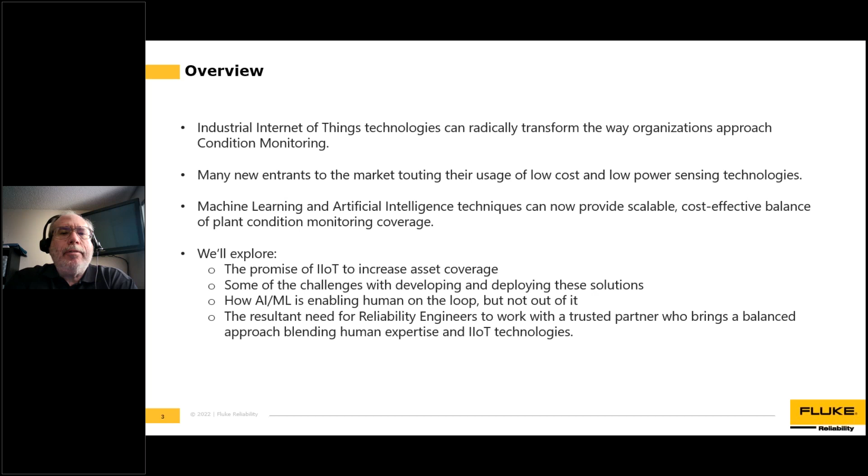Thanks, Georgia. So let's get started. What we're going to be talking about today is a lot of the things that we've been seeing over the years and hearing a lot of buzz about, the Internet of Things coming to fruition with condition monitoring. Here's an overview of what we're going to be talking about today. I'm not going to get real deep into this because you'll see each of these, and you may have already seen this overview, but we're going to talk a little bit about each one as we go through and discuss how the Internet of Things is going to be affecting condition monitoring.

So let's just jump into it. What we're seeing is, and keep in mind that condition-based maintenance, vibration analysis, reliability, and improved maintenance have been around for many years. It's not like we're reinventing the wheel or redesigning it. It's just a way of using today's communication and other advancements to make things run smoother and give us a nice fresh way of doing what we've been struggling to do for many years.

So what we're talking about here, we're going to walk through each of these steps real quick. Even before we talk about this potential failure curve and acquisition of condition monitoring data, we want to talk a little bit about installation, because if you already have machines in a bad position, or if we can make machines a little bit healthier, it can help us out. So let's jump into each one of these steps real fast.

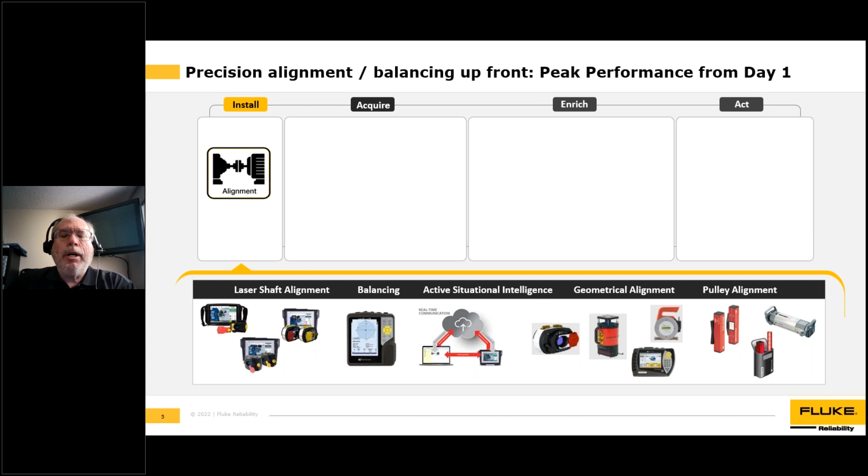So even before acquiring data, we should make sure our machines are in the best possible shape. And then we start acquiring the data. Good data is paramount to getting good information.

So we're going to talk a little bit about that. The first step of getting answers is to start with data and connecting that data, not just getting a bunch of numbers from a lot of different tools.

So the next step we want to talk about is getting data from multiple tools and multiple technologies, from people, from observations, and from pictures, and enriching that data to get answers from it. Because numbers on a chart, in a spreadsheet, in a desk, in a file cabinet isn't doing us any good. So connecting that information and getting answers out of that data is really a key point.

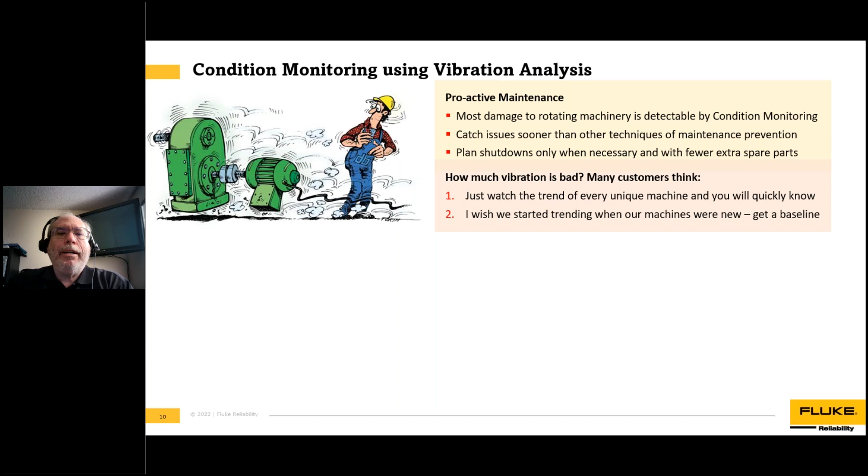The purpose of this is so that from the vibration of the machine, we can know the condition of the machine and fix it in advance, and have fewer parts. A lot of people, when they first hear about this concept of using vibration, think that it's easy, basically like a temperature or pressure, just a number. They think that if all they knew was the vibration, they would somehow automatically know what is good and what is bad, and when the vibration got high, they would fix the machine.

Well, let me tell you, it's a little bit more complicated than that. So the bad news is vibration from a machine is very dynamic. It's like an EKG on a person. An increase in vibration could be from not just a fault, but from background noise, adjacent machines, the structure, resonances, changing load and speed. Somebody could have started up an adjacent machine and the vibration could increase.

And what is the vibration level that you need? So it isn't just a number, and we can't just magically watch that number. The good news is vibration experts have been analyzing data for 30, 40, 50 years and have a good idea that a mechanical fault has a pattern. The algorithms and rule bases that vibration experts have been using can tell us if it's noise, or structure, or a fault. So what I'm trying to say is, it isn't just a simple number. It's like a doctor having to read an EKG.

The other thing is, a lot of people think that they needed to do this when the machine is new. Well, I can tell you from personal experience that just because a machine is new doesn't mean that it's healthy.

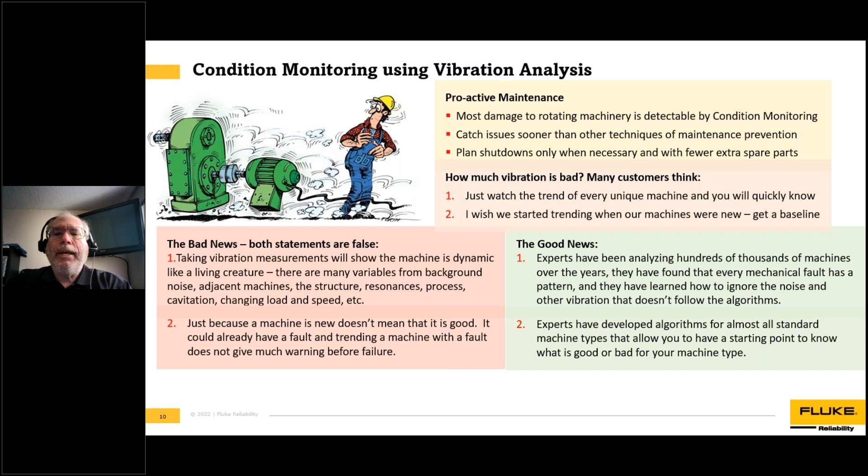What we really want to do is look at the machine and watch it over time, and look at patterns and look at different machine types, because we know that vibration from a certain type of machine, like a motor coupled pump, is going to have certain vibration and certain patterns, and so we can learn from that.

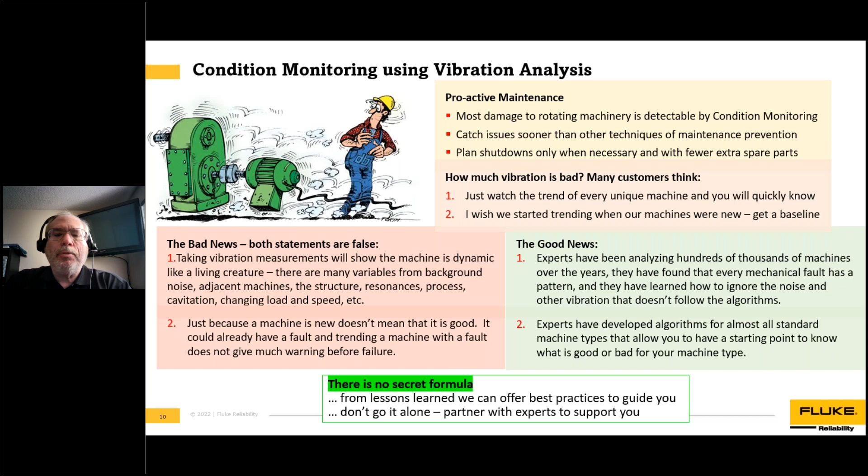What I'm trying to say is, there is no black box, there is no magic secret formula, but from lessons learned from looking at machines over the years, we know what the patterns look like and we can follow some best practices. And also, don't do this on your own. It isn't something you're going to want to do alone, you're going to need some help, and we'll talk a little bit more about that.

So the next thing, and again, I apologize for vibration experts on the call that already know this, but for those that aren't vibration experts, let me do a little bit of an explanation on what vibration is, because a lot of people have this idea that vibration is a simple number. There's really 3 different types of vibration.

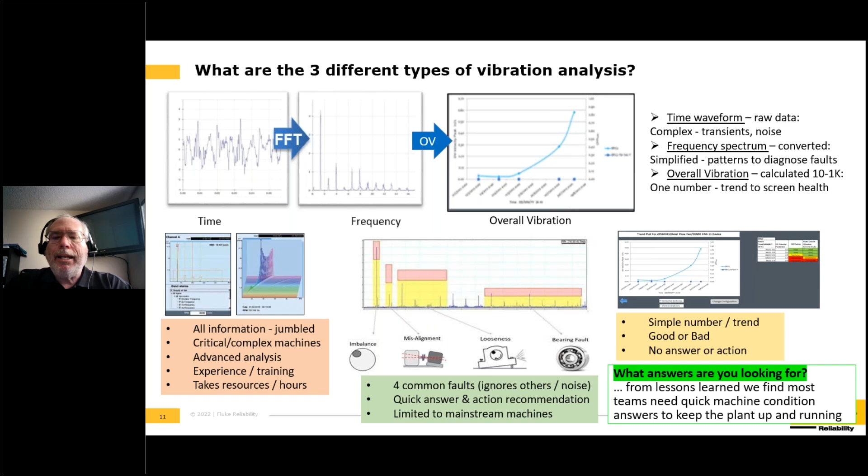So we need to get answers, and I've already talked about that. All right, so with a lot of the new things coming on the market, we're seeing a lot of low cost and low power sensing technologies, and they're all promising to be able to give you success.

What we've been finding out is that when you look at a customer's goals of wanting to be more proactive, with cost savings and continuous improvement, to actually deliver that and have a successful program where you see more uptime, better cost, more production, better reporting, to get from point A to point B.

We can't do that with just simple, easy to use hardware, because like what I showed you earlier, if we just have overall vibration meters, really all that's going to tell us is the machine good or bad. And because it's only collecting in the low frequencies, it's not going to give us any bearing information. So it really isn't going to get us to the point where we get the answers we need, and we need answers to be able to fix the machine.

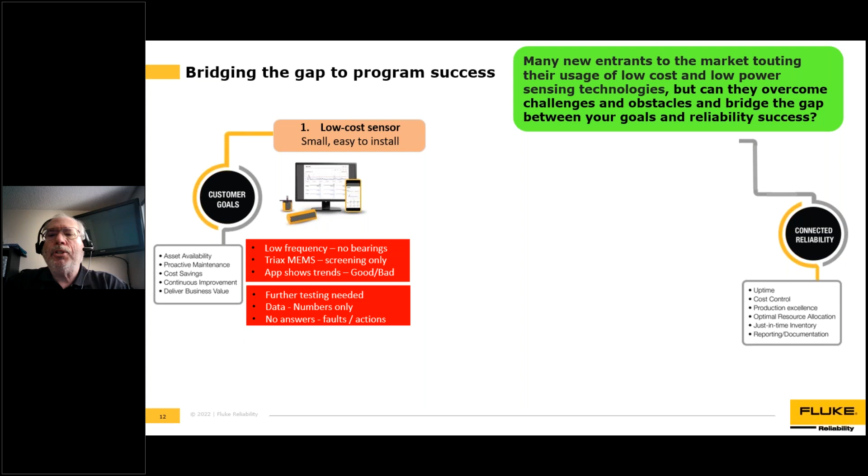Just knowing if the machine is good or bad doesn't get me from point A to point B. All it tells me is that further testing is needed, and just trending a vibration number does not get me the end result of getting the machine up and running.

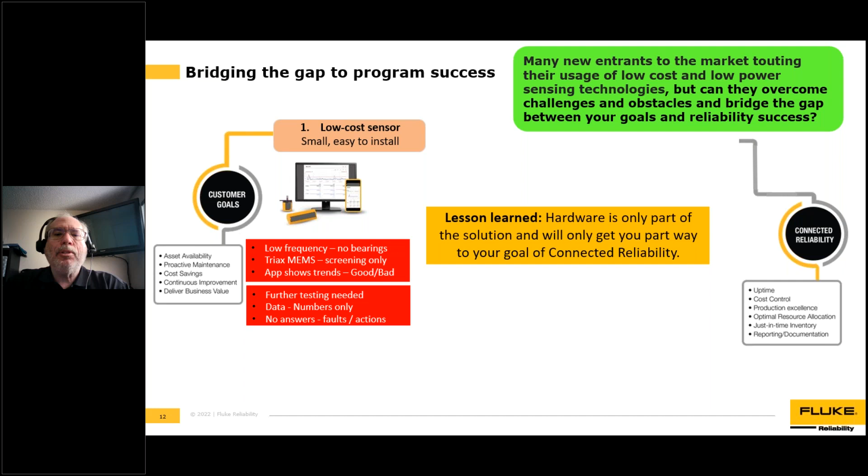So what we've learned is that hardware only is only part of the solution. We need to be able to do more than just a vibration data collection program. So how do we do that?

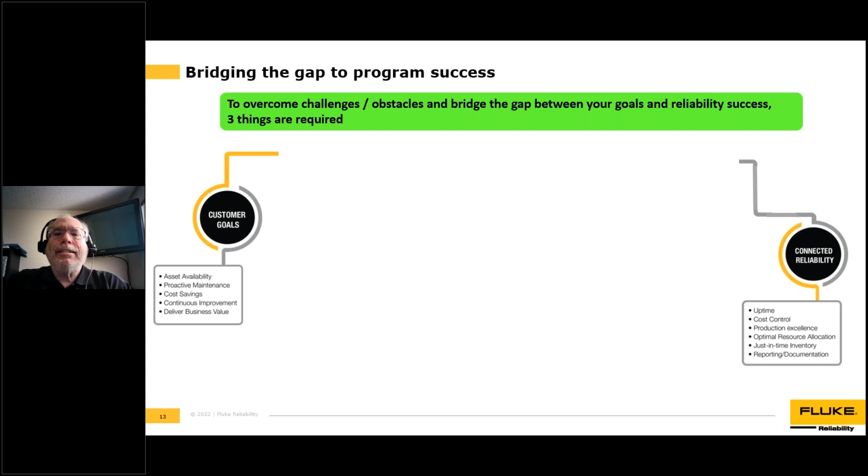What we've learned over the years is that to bridge the gap between your goals and a successful program, you need three things. One is you need a sensor that's going to be able to look not just in the low frequency, but the low frequency and high frequency. So by looking in the high frequency, we can also see bearings.

And like I showed you earlier, we're going to need to be able to look at the spectral data, not just overalls, because we need to look at high frequency to find bearings. We need to look at the spectrum to be able to find the patterns. And the purpose of getting this better data, or best solution data, is to be able to get answers.

Because if all I'm looking for is just a vibration number, then just go for the cheap vibration sensor, but that's not going to get you what you need.

Now, when you think about it, some of the obstacles we're going to run into is, how do I build a program when I'm already 100% busy? And how do I make the best decisions if I don't have complete data? So that's really the challenges that we need to overcome.

We need to get the best data. We need to get the right data. We need to be able to make it into answers, and we need to be able to get alarm notifications. So to do that, to get the answers from the data, it's going to take software plus the hardware.

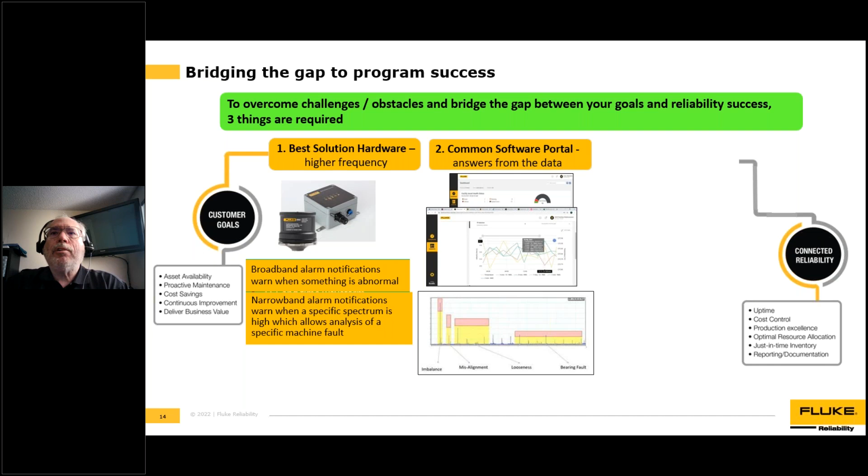With this information, now we can make the right decisions to know when to take a machine down. The challenges that we're going to run into next to be able to get to our goal of a successful program is how to set the alarm levels, and if we have limited resources, who's going to be looking at all these graphs and all of this data?

So we're going to need to be able to reach out and get some support. And one way to do that is expert assistance from remote vibration experts. Another is to have programs and support services to give us support and help us grow a program.

Artificial intelligence, ways to look at these algorithms. And so it's not just that we have to have somebody look at hundreds of sets of data, but it's going to mean that we're going to have to think about this, and to get from point A to point B.

We're going to need to collect the data that we need to get the answers that we need to be able to then generate work orders and have somebody go out and do it. It's a lot more than just a vibration meter.

So having these three parts of the program gives us a solution. A solution is what we need to keep a plant up and running.

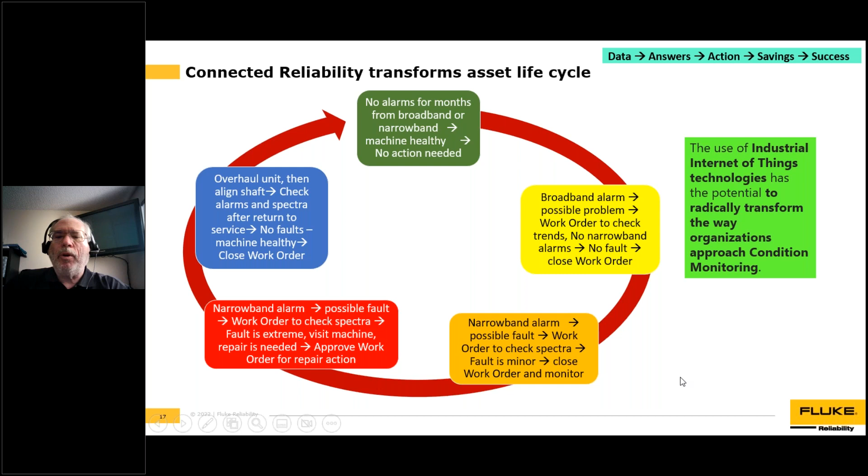The last thing I'm going to roll into, in the last couple of slides here, is don't do it on your own, because there's a lot of people out there that can help. So we're going to talk a little bit about companies like Fluke Reliability that's there to help you as you go.

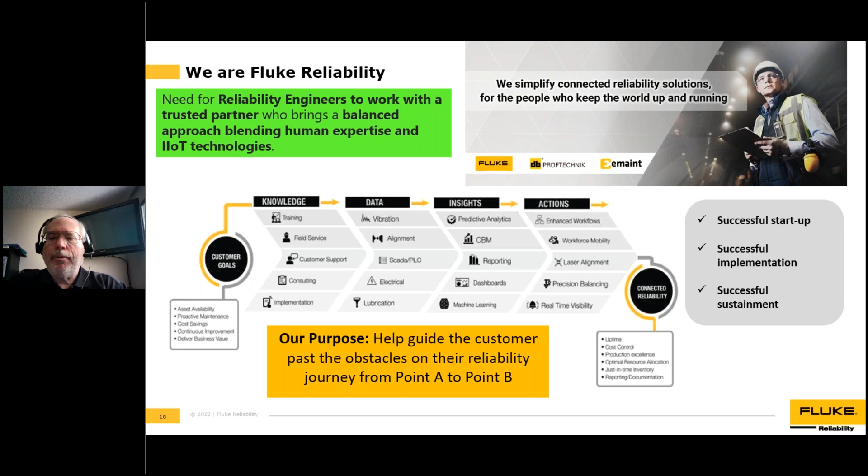Okay, kind of as a summary, just a different way of looking at this. The lessons learned that we've seen over the years is that if you want to get from your goals of an improved maintenance program to the success of a program that's really starting to deliver and give you what you want, you need to have the best solution hardware, but it's not the only answer. So you need to be able to get the data you need. Remember, high frequency data, and you need to be able to get the spectral data, because we need to be able to look at patterns. Overall vibration in the low frequency only isn't going to give us the information we need to get the answers.

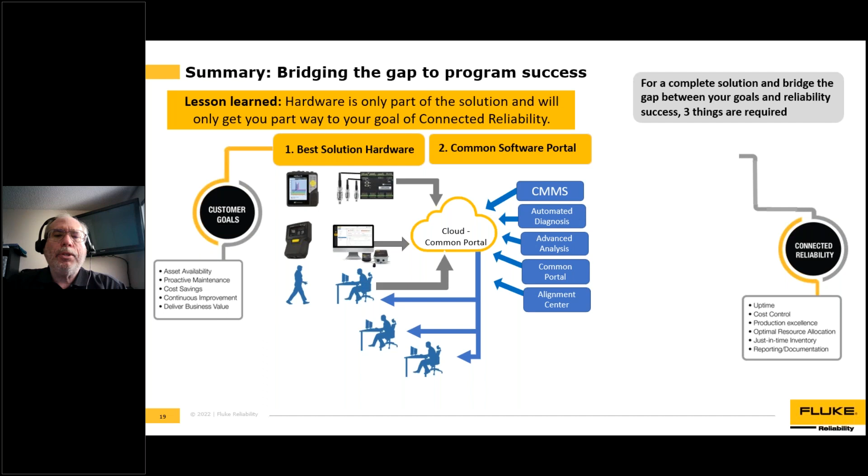And so to be able to complete that, we then need to take the data from portable and online and wired and wireless systems, get that data into a common cloud portal using automated diagnostics, using AI, using advanced analysis, linking this data to vibration experts, and then sending this to a computerized maintenance management system that can automatically generate work orders. And for those that aren't vibration experts and or have limited time and experience, reach out to those vibration experts and reliability experts that can help you start the program, implement the program, and grow and sustain the program, because it's more than just getting a vibration sensor, slapping it on a machine, and looking at vibration trends. We need to be able to get answers out of it and be able to generate work orders, get the information to the right people to go out and fix our machines.

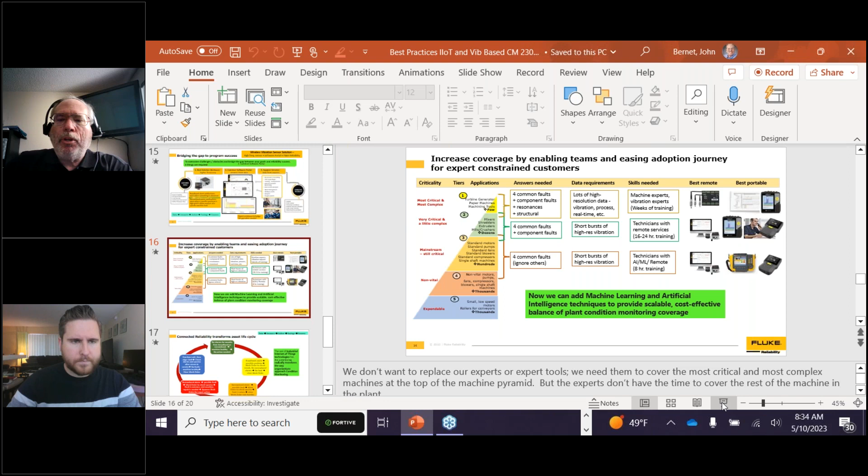That's a great question. What really causes the biggest problems in starting a new program, what causes programs to fail? The number one reason is customers often try to start too big. If you've got hundreds or even thousands of machines in a plant, like this machine pyramid I'm showing you here, there's a lot of different machines. What we found is if you've got 3,000 machines in your plant, it's going to take weeks for approval just to try a condition monitoring program, and months to set up the program. What we've seen over the years is, 3 or 4 months later, you're still setting up the machines, and then upper management asks what kind of success you've had, and you have to say we're still setting up the machines and haven't even started collecting data yet, and the program gets canceled. So what we've learned and best practices show is the best way to start a program is to start small and grow.

What I mean by that is let's start with 10 or 15 machines, in a small area of the plant. Let's go in and get some quick success. Set yourself up for success, not failure. Let's say, hey, I've got these 10 or 15 machines, they're simple and straightforward. I can start monitoring these machines, because you've got to keep a plant up and running — you don't have time to make a condition monitoring program perfect first. So the best way is to start with a few machines, show some success, get buy-in, prove the program works, and then grow the program. We found that's about the only way to get a program started: start small and grow.

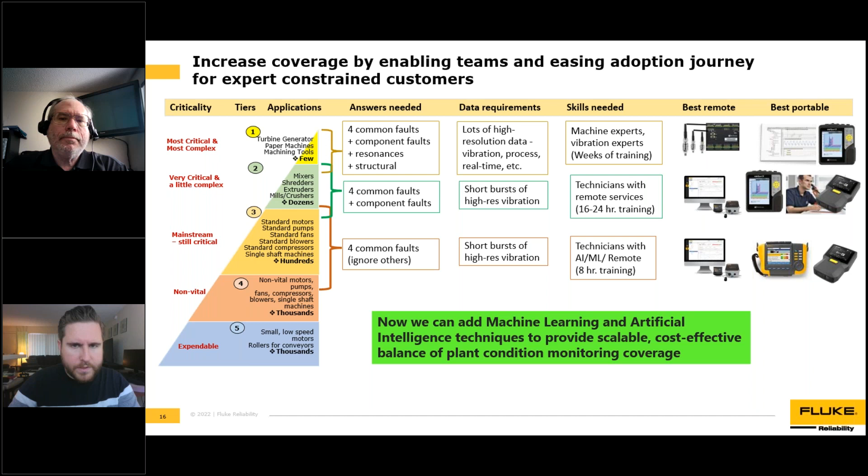Thank you, John. We had another question: how do you know what frequencies are associated with particular failures? Let me see if I can get the rest of this question. I think someone is asking if it's a trial and error process, or is there some science to it — speaking to the narrowband capabilities of condition monitoring sensors or vibration analysis.

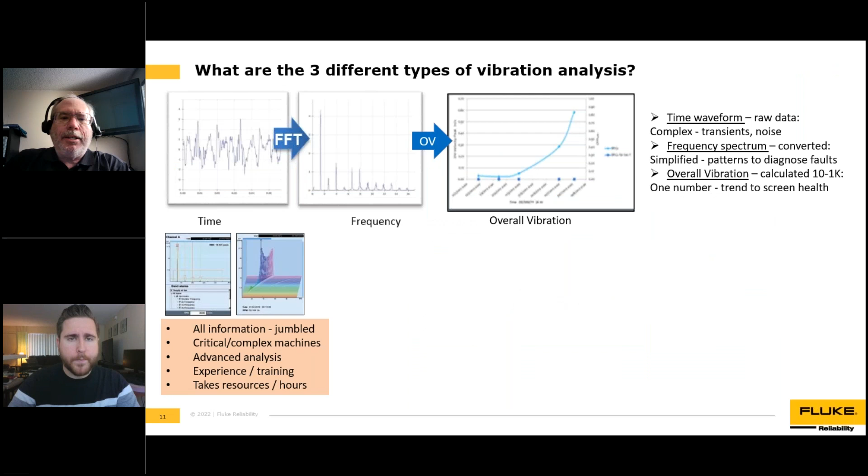Exactly right, so we kind of introduced this. There's a lot of things going on in that data way over on the left, and it's almost like getting lost — you can't see the forest through all the trees. There's so much stuff going on that it's hard to see. And if we simplify it so that all we get is a single number, that makes things a little bit rough too. So that frequency spectrum I showed you in the middle — I think that's the question being asked — there are discrete patterns.

Let me explain that graph in the middle. If you look at this frequency graph, we're plotting frequency from left to right and looking at amplitudes. Each of these vibration peaks — you can see even in the graph above — there's a very large peak, and that peak, for example with the biggest vibration from a rotating machine, is typically from the rotating shaft. So that big peak we see way over in the low frequency is quite often the vibration from the turning motor pump shaft. And these other peaks could be the pump impellers, or other things.

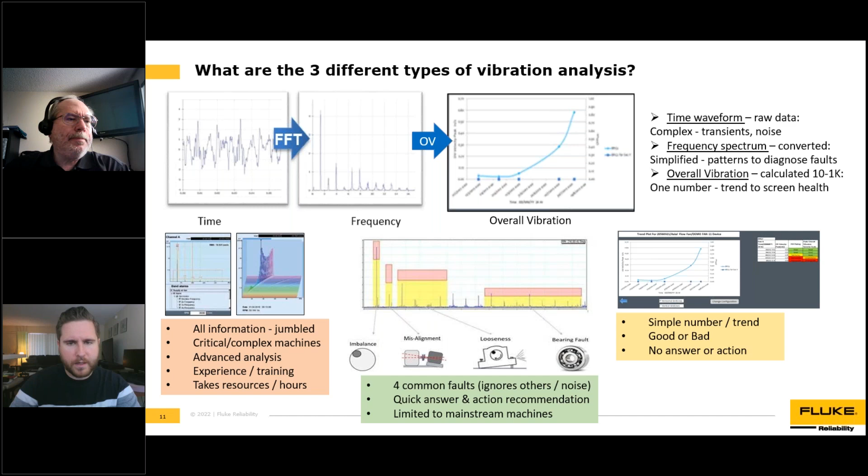Excellent. I had a comment here from Nigel just saying, I agree 100% on starting small, asset criticality analysis—it's fun to hear. We had a few questions here: one about integrating with eMaint, another about seeing if you could get mobile notifications. Is that within scope to talk about here, John?

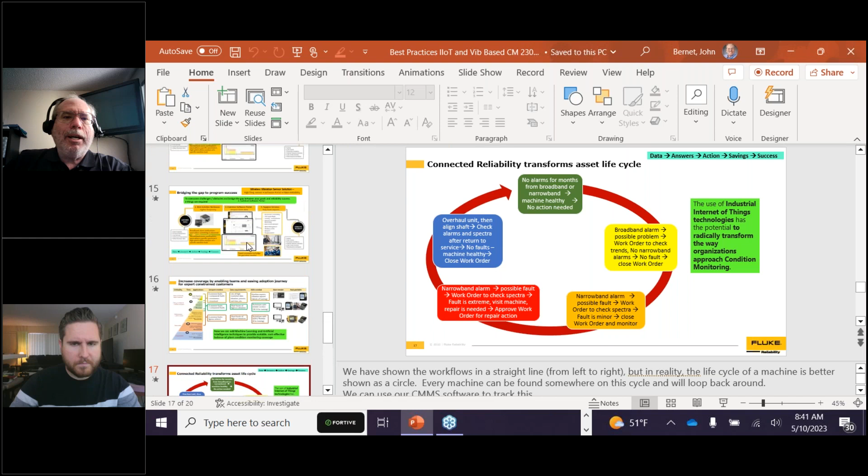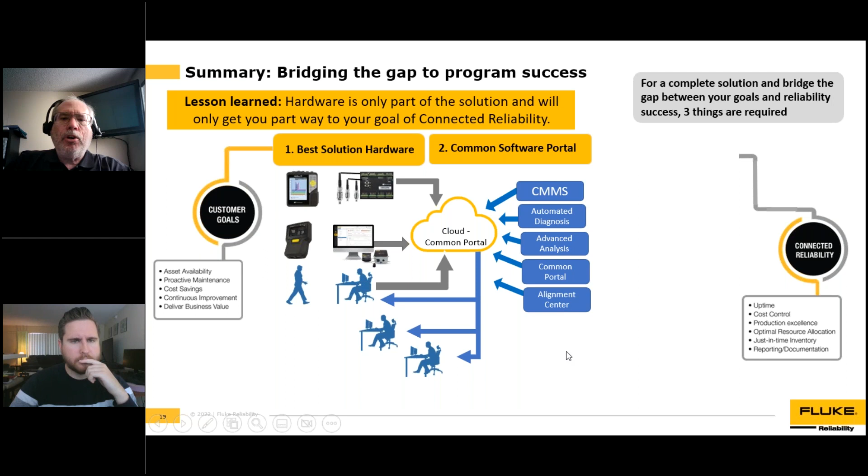Sure, let me jump into that real quick. I'm trying to think about which one is best to jump into. Maybe I'll use this simple one, or maybe even better, as we look going from the left to the right... actually, I know what slide I need to use, and I jumped into the wrong one. Let me go back and start over again.

We get good high frequency data, and we're able to get the FFT spectrum we just talked about, and we're starting to see these patterns of imbalance, misalignment, and looseness, and getting answers from the data. The next step is collecting data with these wireless sensors from many machines in your plant, and instead of portable data collectors, we're not just collecting data once a quarter or once a month—we're collecting data many times a day.

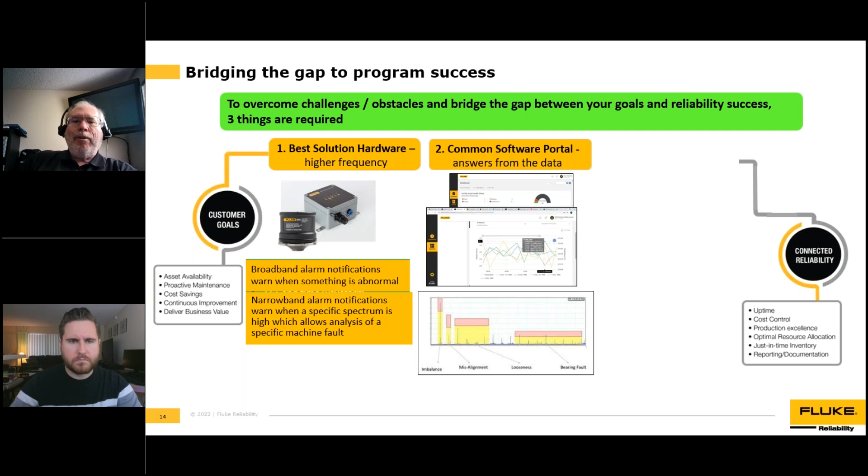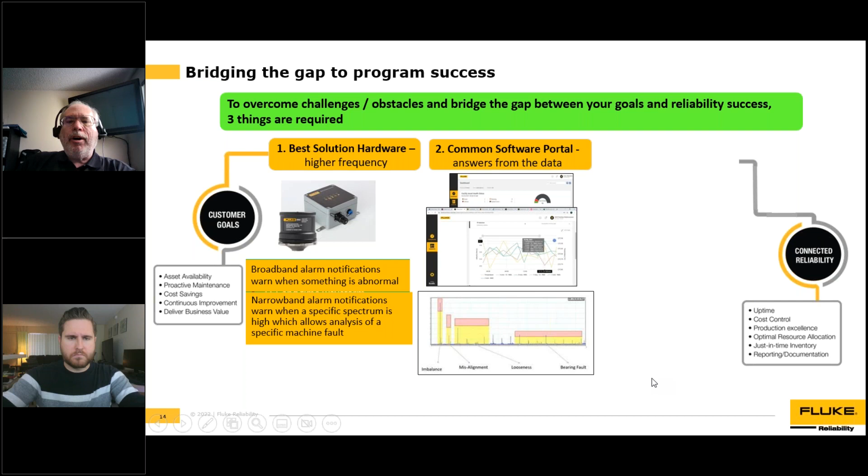If you do the math, you realize now I've got hundreds of data sets. Even if we've made it easy, like we show here in the middle of the page, who has the time to go look at hundreds of these things every day? We just don't have the time and resources. So we've got to find a way to quickly go look at data and be notified when there's a problem. We need alarms and notifications.

The worst thing we can do, and I've seen this happen with a lot of customers over the years, is if all you do is collect vibration data, your vibration sensor becomes a data pump—it just keeps pumping out numbers, and pretty soon you get overwhelmed by all of these numbers. So what we really have to do is, number one, get answers from the data, but number two, we need to get notified when something is wrong. That's one good thing computers can do.

Vibration experts can analyze the data, but they don't have the time to analyze hundreds of data sets every day—there's just no time. That's what computers are really good at. So if we can set up these narrowband alarms, it will quickly look at the data and notify us when it sees high vibration—one of these narrowband alarms.

Instead of having to analyze every set of data, we let the software program go in and say, everything looks good, everything looks good. Oops, you've got a peak, you've got a problem, a high vibration, and it's in this narrow band that might be misalignment. So we need some type of automatic alarm notifications so we know when a possible fault is starting to occur.

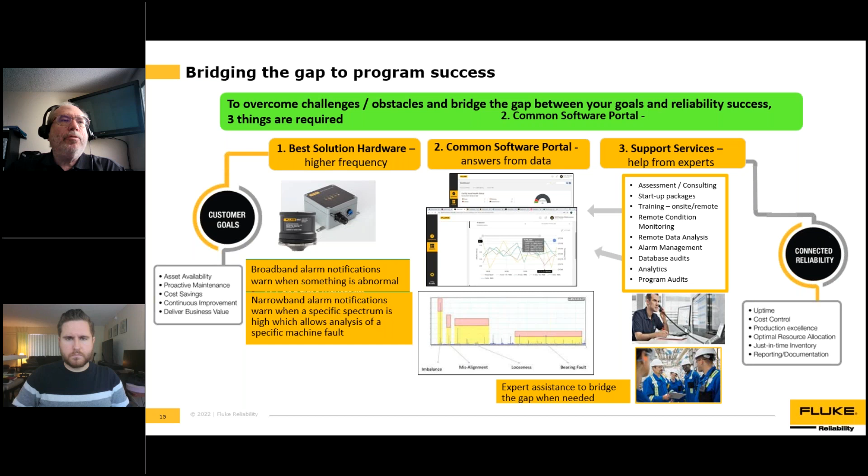Why is it important to put it up on a web-based, cloud-based program? So that everybody can access it, because years ago we tried to network software programs and that becomes an IT nightmare. Let's say you've got hundreds of customers spread across different plants across the country, or even different places across the world, and all of them have to have a software license and access to the network—it becomes a real mess.

And what if you want to share that data with your vibration expert, your thermography expert, or some other third-party consultant? Now you've got to give them a license of the software. But with web-based programs, as long as they have their correct, confidential sign-in and security, we can give them access to the data and they can go look at it.

And so the data is secure on the web, just like Amazon and all these other web browsers, Microsoft, have these very secure web browsers. Well, now we can share that data with everybody in the company that you want to give access to, and third-party consultants and experts and other people. Everybody can have access to the data, but you control who has the access, and you control where the data goes and who gets to use the data.

All right, second question was about AI. The question was specifically on how far do you think AI is being able to diagnose data. I guess we have some things we can talk about in regard to our software. So the short answer is we've been doing artificial intelligence for years already.

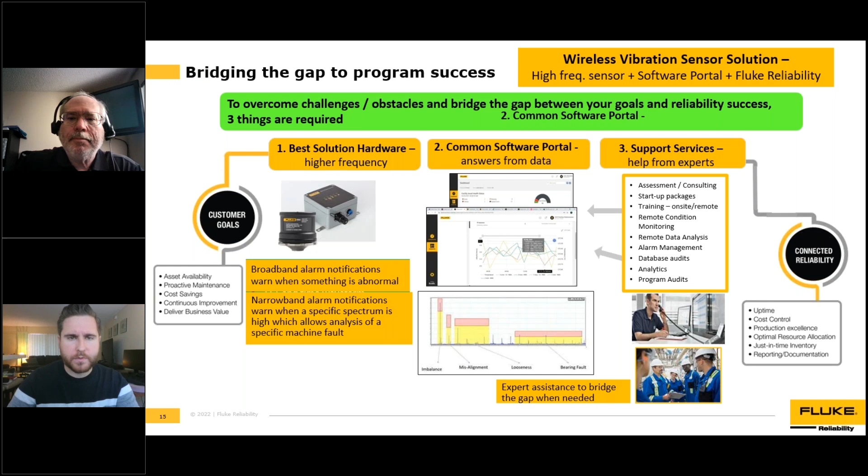I just wanted to quickly answer one more question, which is someone asking about if Fluke has representatives that help eMaint customers analyze their equipment and current structure to provide guidance. And yes, there's expert services available for every step in the process, from the tools and the sensors to the condition monitoring to the CMMS.

And I think with that, we can wrap everything up right on the dime. So thank you so much, John, for sharing your insight and expertise. I love going to these myself because I've got to take some notes.

So yeah, do you have any comments you'd like to make in closing? I think in closing, a couple of quick things. Don't fire your third-party consultant, because you need them for the complex machines and complex applications. Find a consultant to guide you past the obstacles on your path to reliability. Look for a solution, not just hardware.

One example of that is, think about flip phones years ago. That was hardware that we all needed, but now we see these smart devices that are connecting us to the internet, to cameras and everything. So it's more than just a phone, it's a solution, it's a communication solution. So those are some of the things that I think we're seeing coming with this Internet of Things and condition monitoring. I'll leave you with that.